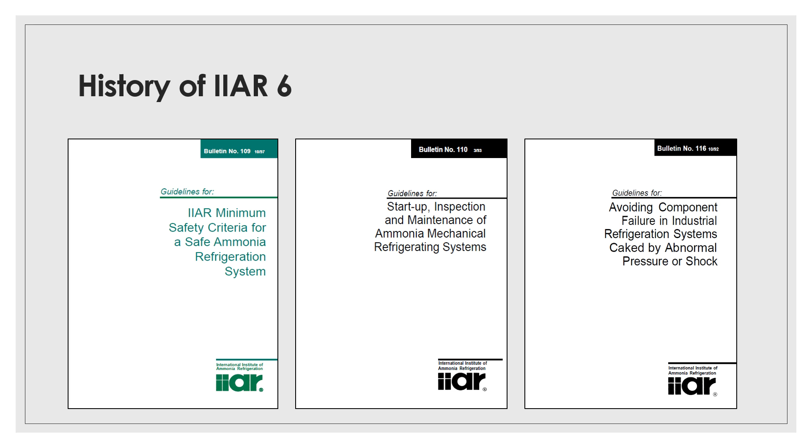Most notably, IIAR 6 builds upon and improves the content from several of IIAR's bulletins, namely Bulletin 109, 110, and 116. Bulletin 109 was published in 1997 and gained popularity primarily because of the checklist it contained, which came to be affectionately known as B109s.

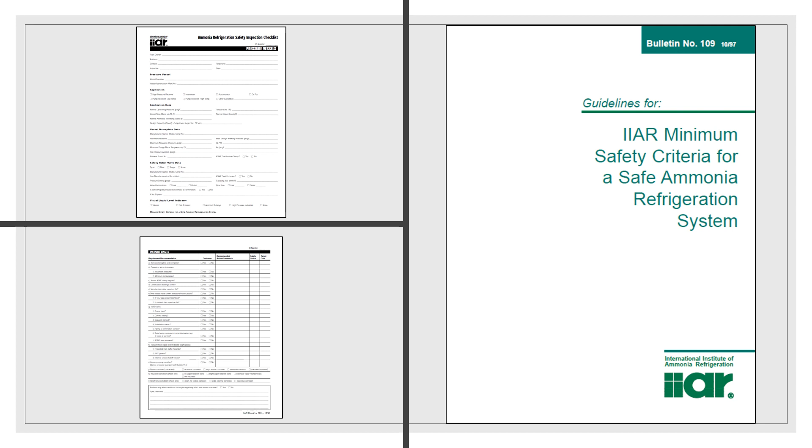The B109 checklists were long considered the gold standard for both performing and documenting annual mechanical integrity inspections of ammonia refrigeration systems. Similarly, IIAR Bulletin 110 contained many helpful resources regarding inspection and maintenance of ammonia refrigeration systems.

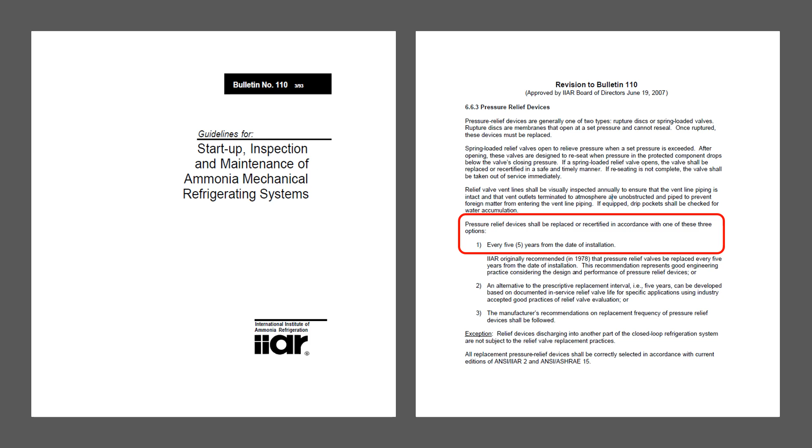While there is a lot that could be said about Bulletin 110, one of the more noteworthy sections of this document is displayed on this slide and requires that relief valves be replaced every 5 years unless an improved alternative method is developed. At the time that the bulletins were published, it was not known that these documents would be...

...viewed as recognized and generally accepted good engineering practice, or RAGAGEP, and therefore enforceable by OSHA and EPA. As such, the bulletins did not use code language, words such as shall and must, and are peppered with vague or optional requirements using words such as can, should, and may.

For example, IIAR Bulletin 110 Section 6.4.2 reads as follows: The system should be checked regularly for the presence of non-condensable gases, which should be purged as necessary from the receivers and/or condensers, preferably into a non-condensable gas remover or purger, but alternatively into water. I think you get the idea. Just in this short paragraph, optional phrases are used 7 times.

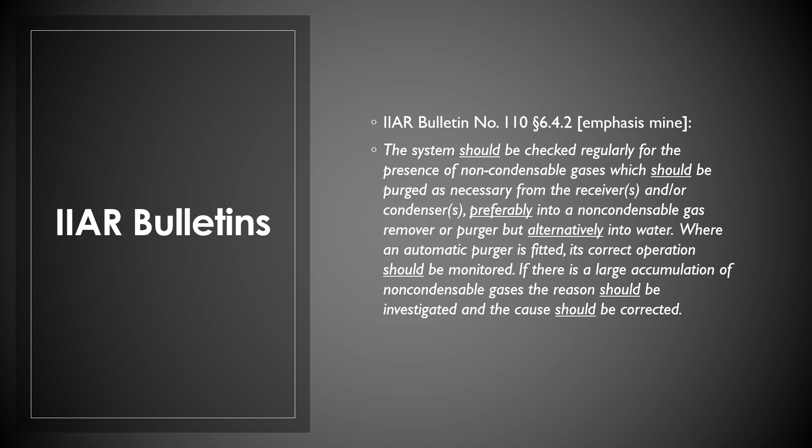As OSHA and EPA began to utilize IIAR bulletins as enforceable RAGAGEP, it became clear that the best way to address the shortcomings in the bulletins was to retire them altogether and replace them with standards written in code language.

Years ago, IIAR cast a vision to become the premier standard writing organization for ammonia refrigeration. At the time, the organization had only published 2 standards, but set its sights on a suite of standards to address ammonia refrigeration from cradle to grave.

In the past decade, IIAR has been successful in becoming a recognized standard writing organization. All major model codes now provide direct reference to IIAR standards. The term model code refers to building codes, fire codes, and mechanical codes that are enforced by local building departments when new construction occurs.

In California, the governing model codes are the California Mechanical Code, California Building Code, and California Fire Codes. To stress the importance of IIAR standards in these model codes, I propose to you that when you hear the term IIAR standard, it carries the same weight as Mechanical Code or Fire Code.

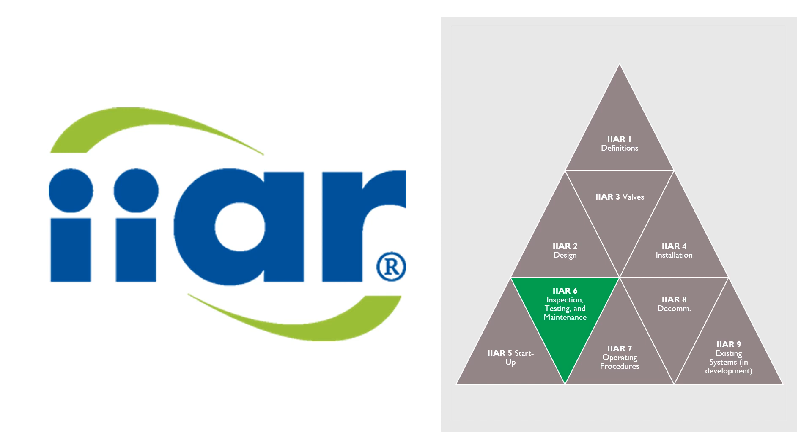Standard 6 is the most recent addition to IIAR's suite of standards and was published in the summer of 2019. As a document, Standard 6 is divided into 3 parts.

Part 1 addresses general requirements for the inspection, testing, and maintenance program, while Part 2 contains the prescriptive ITM tasks for various types of equipment. Both Part 1 and Part 2 are normative, meaning these sections are mandatory. Therefore, you'll see words such as required, shall, must, and will in these chapters.

Part 3 contains several appendices that are informative or supplemental. These appendices are not intended to be required, but rather informational. In Part 3, you'll find words such as should, may, could, and can.

To allay any worry that you might already be out of compliance due to the requirements in this new standard, it is worth highlighting that Standard 6 is a voluntary standard until adopted by an owner or an authority having jurisdiction. Thankfully, the text of Section 4.1.3 is consistent with the approach we've promoted regarding RAGAGEP changes in the past. Facilities need not change their mechanical integrity RAGAGEP simply because a new standard has been published.

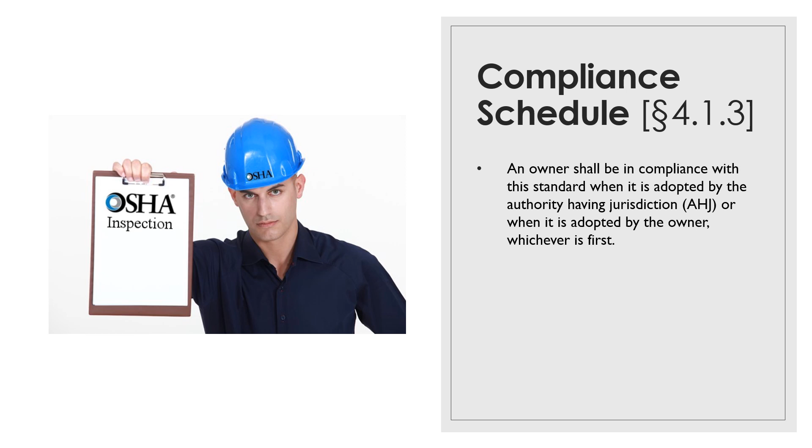However, this standard is the most current reflection of our industry's consensus toward inspection, testing, and maintenance of ammonia refrigeration systems, so it will be important to monitor how government agencies such as OSHA and EPA elect to use this document in enforcement. Before diving into specific requirements of any standard, it is necessary to understand who the standard was written for.

In other words, is it IIAR's intention that this standard apply to me? The purpose of Standard 6 is communicated in Section 1.1, which states that the document specifies minimum requirements for inspection, testing, and maintenance for closed-circuit ammonia refrigeration systems. The next paragraph succinctly describes the scope of the standard as record-keeping, inspection, testing, and maintenance of closed-circuit ammonia refrigeration systems.

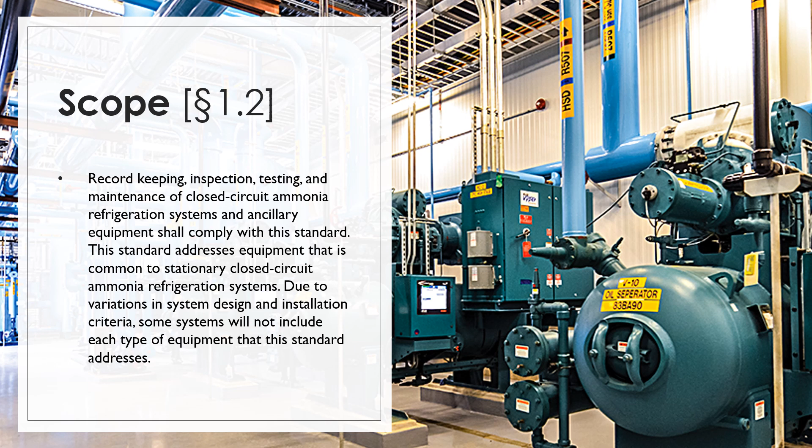and ancillary equipment. It is worth noting that the scope of the document is not dependent on the amount of ammonia in a system. In other words, Standard 6 does not distinguish between Program 2 and Program 3 like the CalARP and RMP regulations do.

Who is responsible for implementing an ITM program at your facility? Section 4.1.1 speaks to that very question when it states that the owner or the owner's designated representative shall be responsible for overseeing and ensuring that inspection, testing, and maintenance be performed in accordance with the requirements of this standard.

While the owner or the designated representative is responsible for ensuring that ITM tasks are performed in accordance with Standard 6, compliance with the standard is voluntary until either of the following occurs: 1. The authority having jurisdiction adopts the standard, or 2. The owner adopts the standard.

Common authorities include building and fire code officials, OSHA, US EPA, and local enforcement agencies such as the CUPAs in California. There typically isn't an official announcement when an authority having jurisdiction begins applying a new standard for issuing citations, so our industry will likely learn how each agency plans to enforce Standard 6 in the coming months.

We advise all facilities to be prepared to defend the basis for each mechanical integrity task and task frequency in your PSM program. As stated earlier, a facility need not change RAGAGEPs simply because a new standard has been published. But due to the importance of this particular standard, it would be prudent to perform a gap analysis of existing ITM tasks against what is contained in Standard 6 and adjust your MI program accordingly.

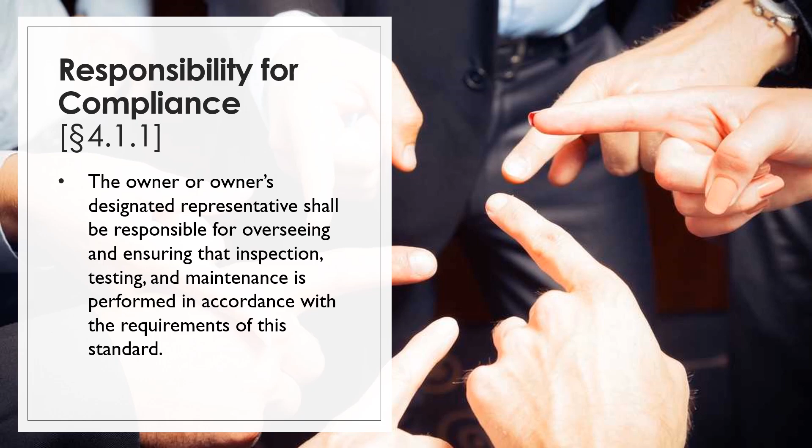One of the more noteworthy effects of Standard 6 being published is that Bulletin 109 has been officially retired. IIAR Standard 6 Appendix B includes improved checklists that aim to build upon the foundation of B109. B109 included 10 checklists, while Standard 6 has 12. Notably, new checklists have been developed for purgers and ammonia absorption systems.

The ventilation checklist in B109 has been expanded to include other safety devices and renamed Safety Systems. Some content has been moved from the B109 General Safety Checklist and placed in Safety Systems, so it was fitting to rename the checklist General System.

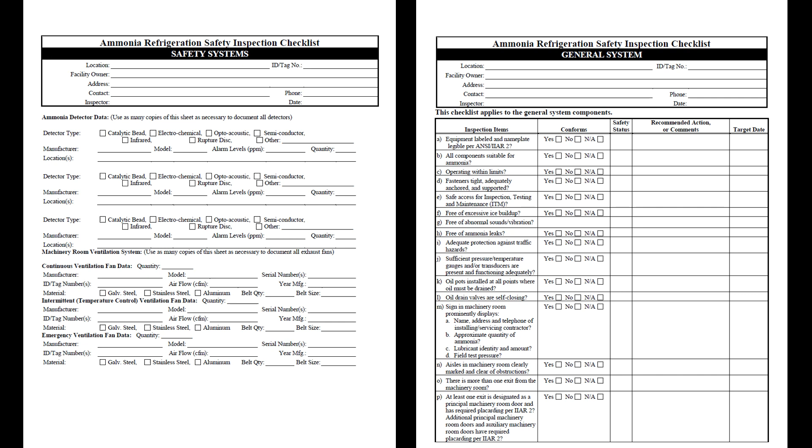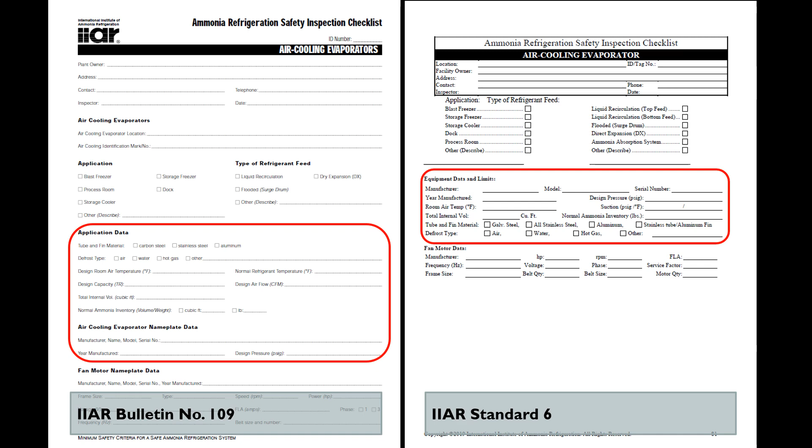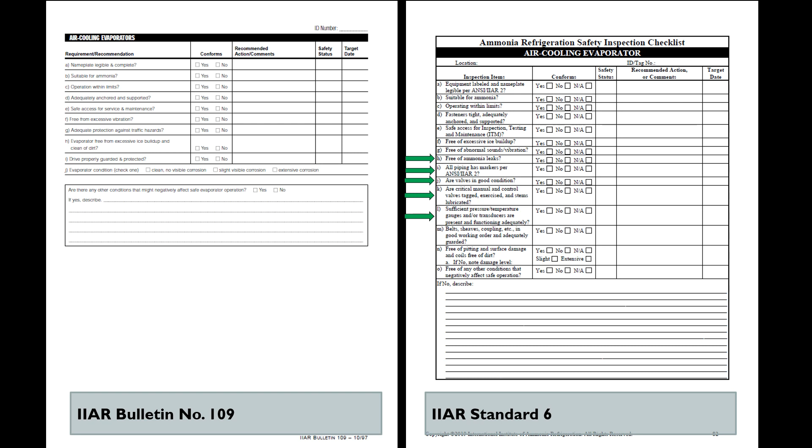A noteworthy difference between B109 and Standard 6 Appendix B is that the new checklists contain additional content not included in B109. It's beyond the scope of this presentation to address each change, but this slide highlights 5 new questions that have been added, inquiring about leaks, pipe labeling, valve condition, valve exercising, and instrumentation.

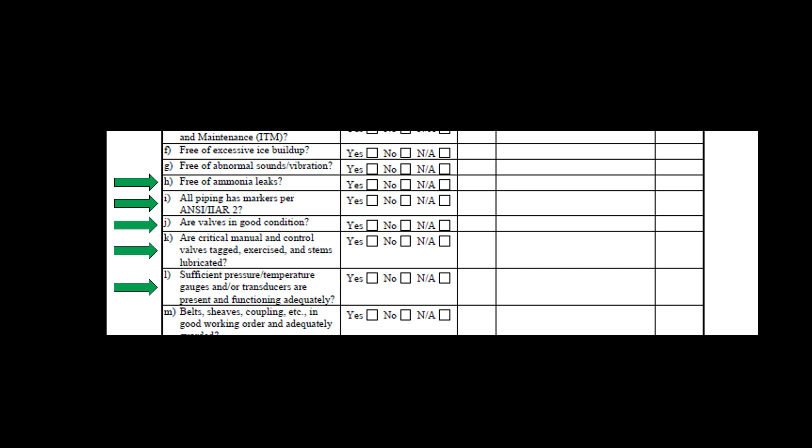Section 5.1 of Standard 6 lays out the foundational requirements of an ITM program. Most obligations in this section build upon an existing mechanical integrity requirement in the PSM regulations. For example, Section 5.1 requires that the owner or owner's designated representative shall ensure an inspection, testing, and maintenance program is developed to reduce the probability of an ammonia release.

This language carries much of the same intent as Title 8, Section 5189, J1A, which states that the employer shall establish and implement written procedures to maintain the ongoing integrity of process equipment and appurtenances.

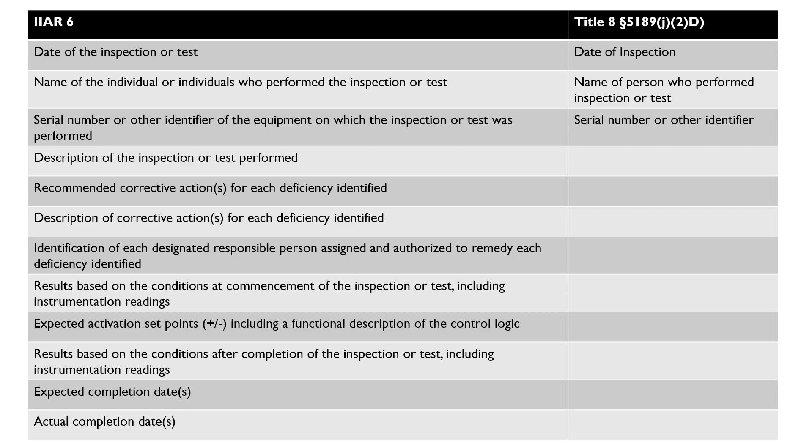As it relates to documenting inspection and tests, however, IIAR 6 requirements extend beyond PSM, as illustrated in this table. PSM only has 3 prescriptive documentation requirements, while Standard 6 has 12.

For those utilizing PSM Writer to document ITM tasks, there is no cause for alarm, as the requirements for IIAR 6 were incorporated into the software long before the document was published. The next several slides demonstrate how PSM Writer addresses each of the documentation requirements in Standard 6.

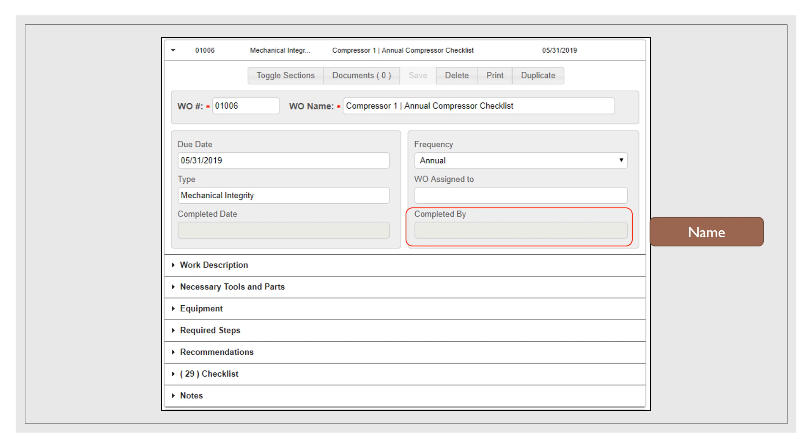The name of the inspector is inputted into the completed by field. The serial number is documented by clicking on the equipment section, then selecting the associated equipment. Specifications for each piece of equipment, including serial number, can be viewed by opening the equipment record.

An ITM description can be documented by typing into the work description text editor. Findings requiring correction are documented in the recommendations section. When adding a new recommendation, a description of the deficiency and the recommended remedial actions can be inputted.

The person responsible for correcting the recommendation can be added in the responsible person field, and the due date of the recommendation can be selected from the calendar dropdown. Once the recommendation has been resolved, the completed date field is used to indicate the actual date that the item was addressed.

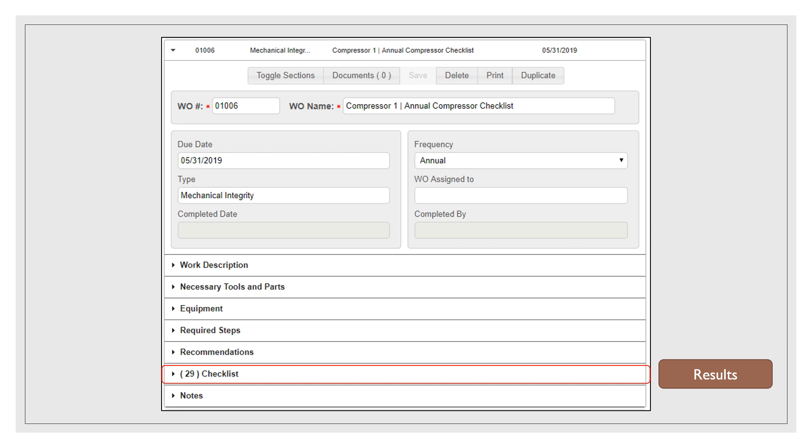Each work order can have multiple checklist questions which can serve to document the results of the inspection or test. Each question receives a yes, no, or not applicable answer, and the checklist comments field can be used for including information such as activation set points.

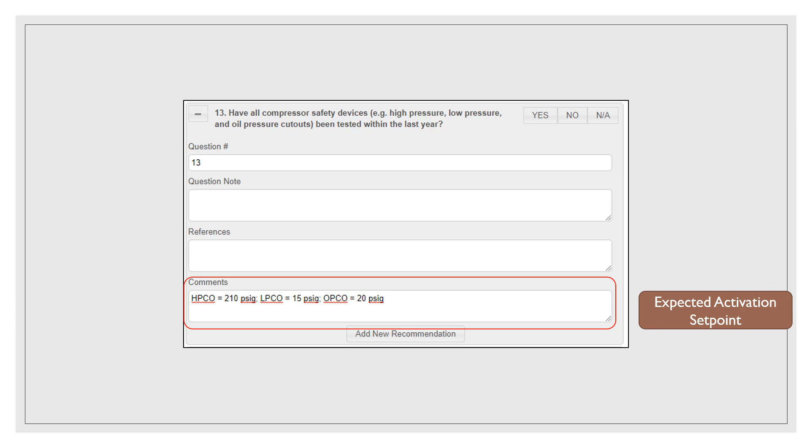I trust the previous set of slides helps reassure you that your Standard 6 ITM documentation requirements are being met if you're using PSM Writer.

Say you have a task to perform a compressor inspection annually. On year 1, you complete the task on July 1st, which results in the same task being due on July 1st of the next year.

When the next year rolls around, other obligations have filled the calendar during that period. In order to prevent the task from becoming past due, you knock it out early on June 15th. If the same situation occurs in subsequent years...

...before long, the task that was originally due in July is being performed in the spring. Standard 6 remedies this problem in Table 5.2, which defines the calendar basis of recurring frequencies used in the document. As the table illustrates, an annual task may be completed at an interval between 9 and 15 months and still be compliant.

A task required every 10 years can be completed any time after 9 years or before 11 years to comply with Standard 6.

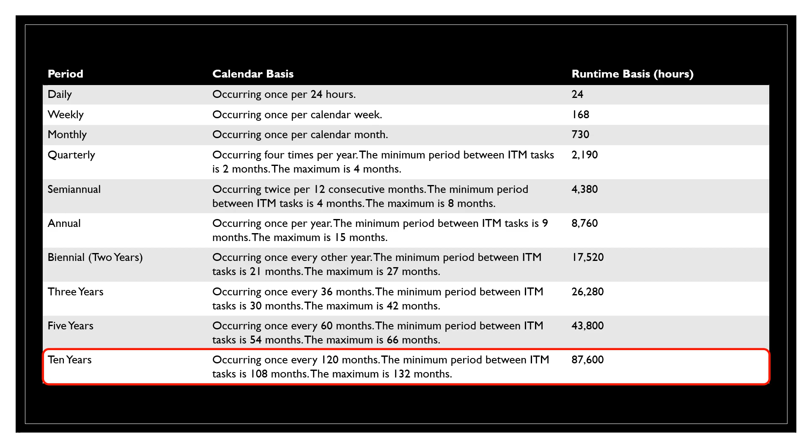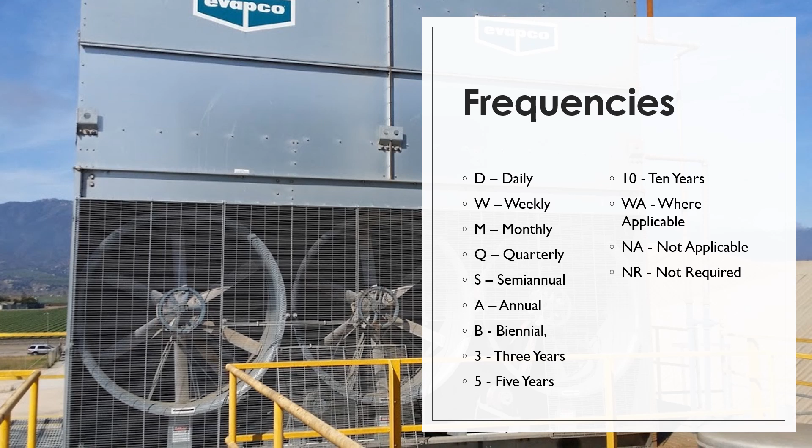Chapters 6 through 15 are filled with ITM tables, which list required tasks and frequencies. The frequency abbreviations used in the tables are shown in this slide. For example, when you see the letter S in an ITM table, you must recognize that the task is required semi-annually or every 6 months.

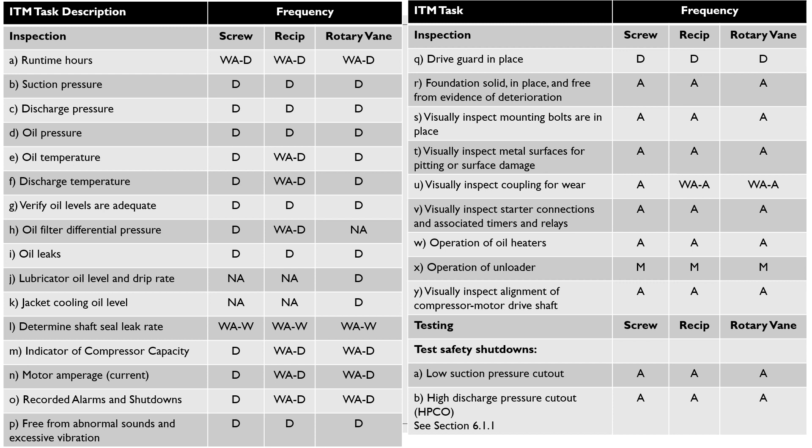Here is the ITM task table for compressors, included in Chapter 6. The table is laid out with the ITM task description in the left column and the frequency the task must be performed in the adjacent columns to the right. There are 3 columns to the right of the task descriptions which clarify the requirements for each of the major compressor types: screw, reciprocating, and rotary vane.

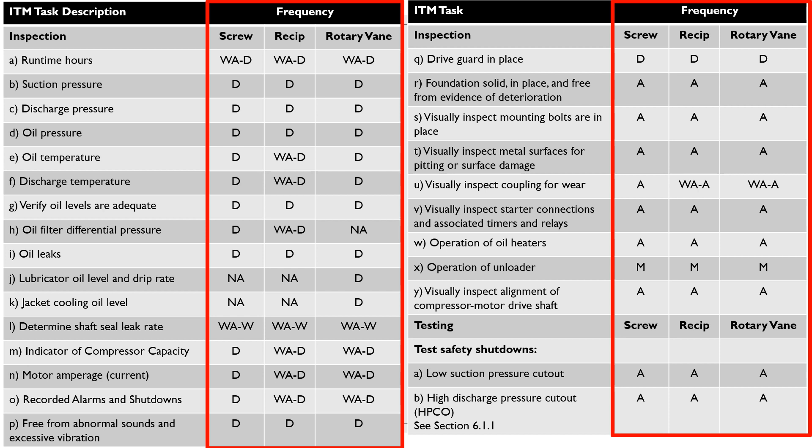To demonstrate how to read the table requirements, compressor high discharge pressure cutouts must be tested annually, as indicated by the A in the highlighted cells on this slide.

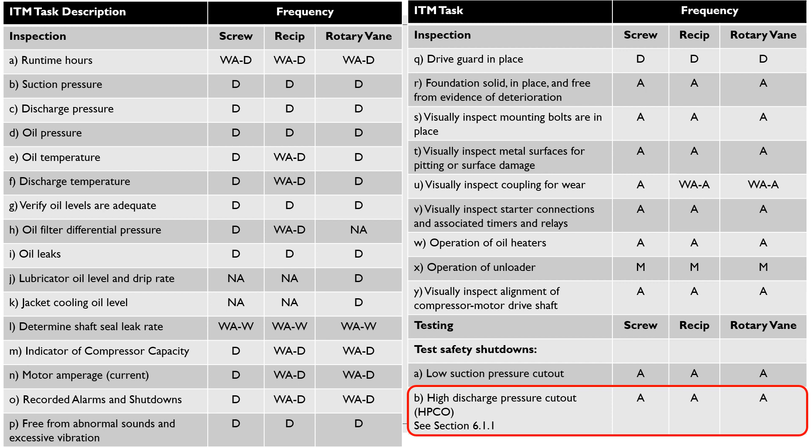We certainly don't have time to review each ITM task in Standard 6, but to help you get a sense of the breadth of the requirements, the following slides will quickly display each of the ITM requirements for compressors in Table 6.1.

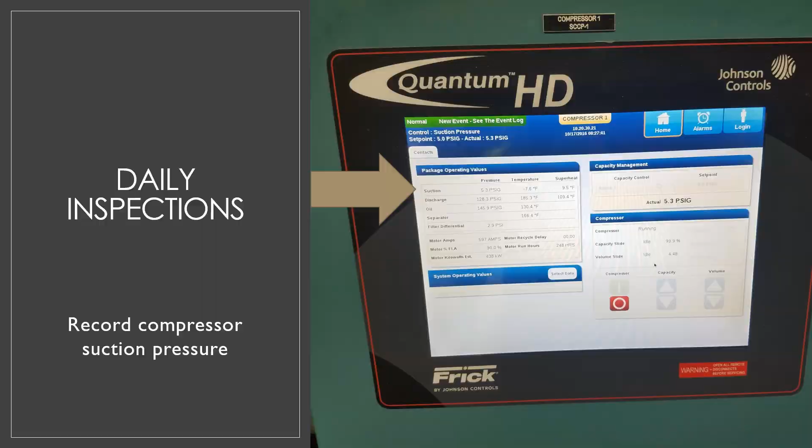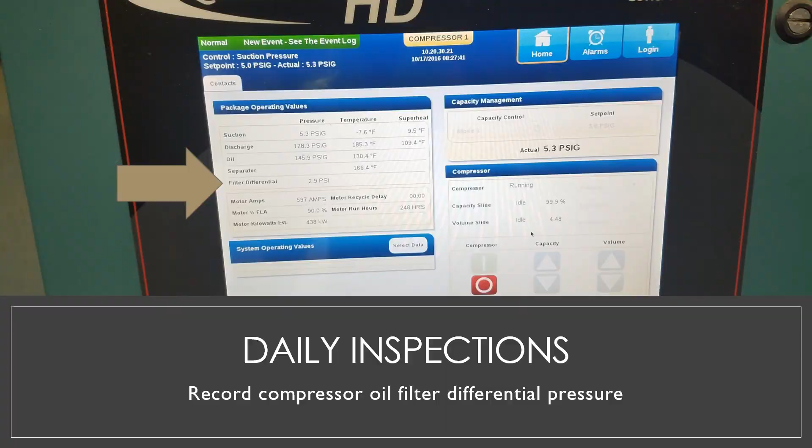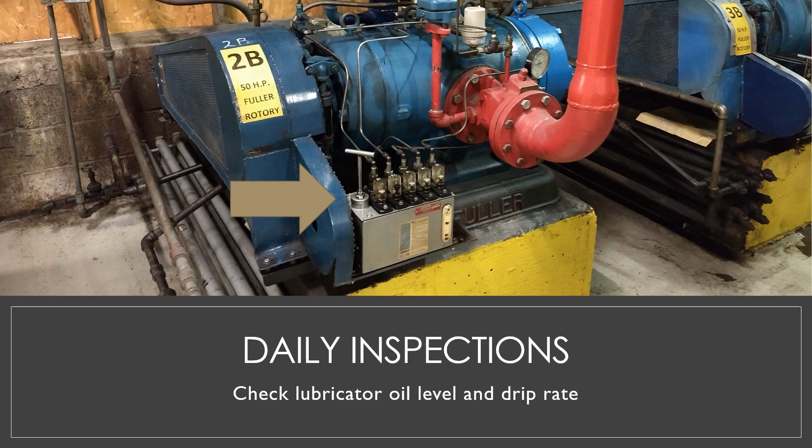The following items must be inspected daily: compressor runtime hours, suction pressure, discharge pressure, oil pressure, oil temperature, discharge temperature, oil filter differential pressure, compressor motor amperage, compressor alarms and shutdowns, oil levels, oil leaks, rotary vane compressor lubricator oil levels. The compressor should be inspected for unusual vibration.

Weekly, the shaft seal drip rate should be observed.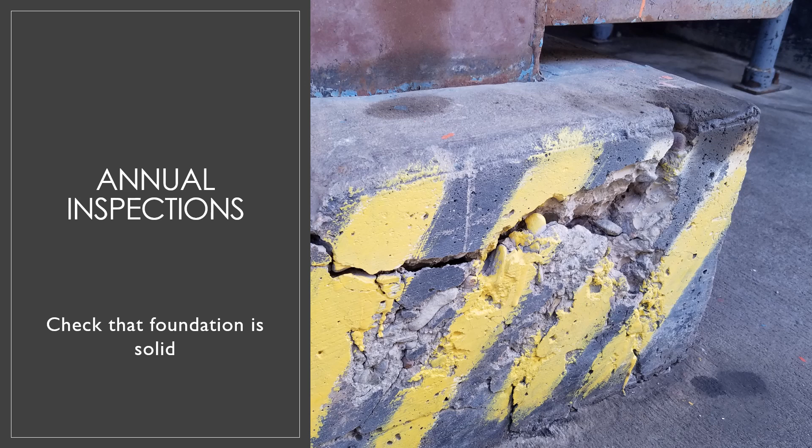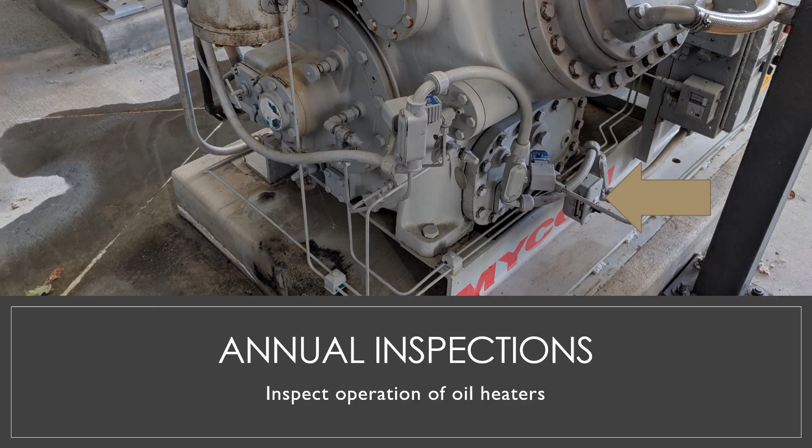Annual inspections include inspection of foundation, mounting bolts, metal surfaces for pitting or surface damage, inspect coupling for wear, starter connections, operation of oil heater, operation of unloader, alignment of motor drive shaft.

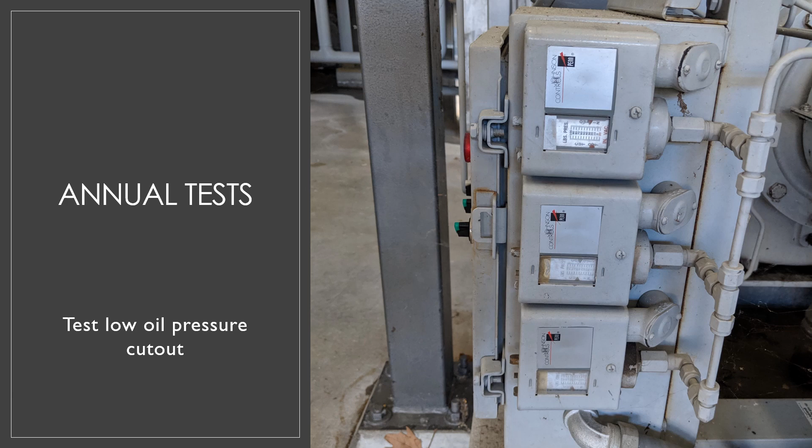Annual tests must be performed on the following: low suction pressure cutout, high discharge pressure cutout, high discharge temperature cutout, low oil pressure cutout, high liquid level cutout.

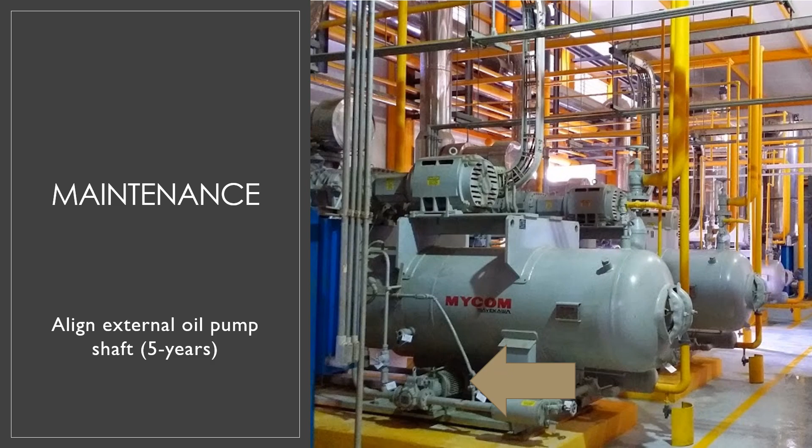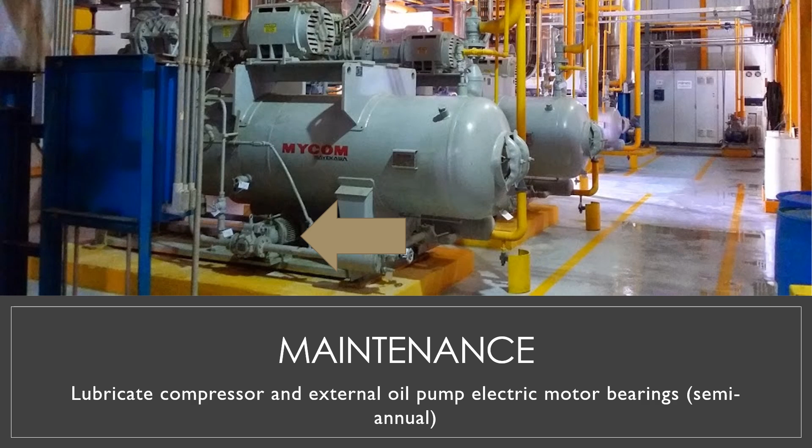Maintenance tasks in Table 6.1 include: add compressor oil, change oil filter, clean external oil pump, perform oil analysis, align external oil pump shaft, change oil, verify coupling bolts are tight, replace shaft seal, measure compressor motor drive shaft alignment.

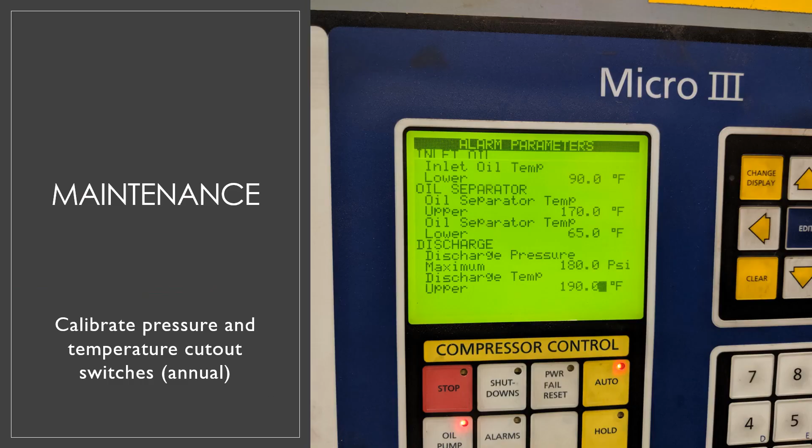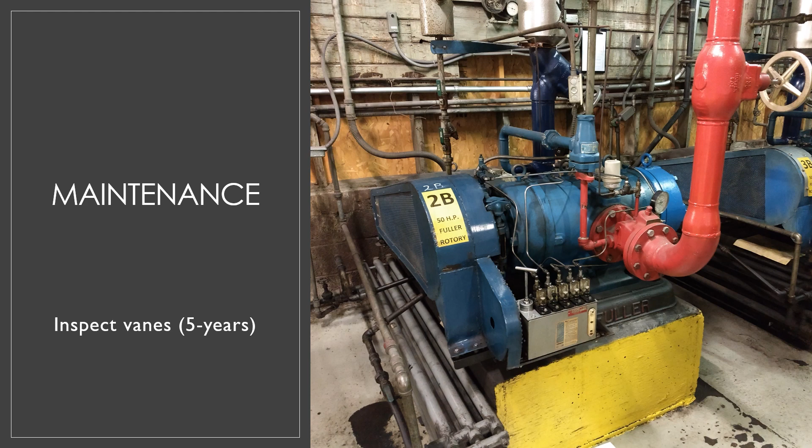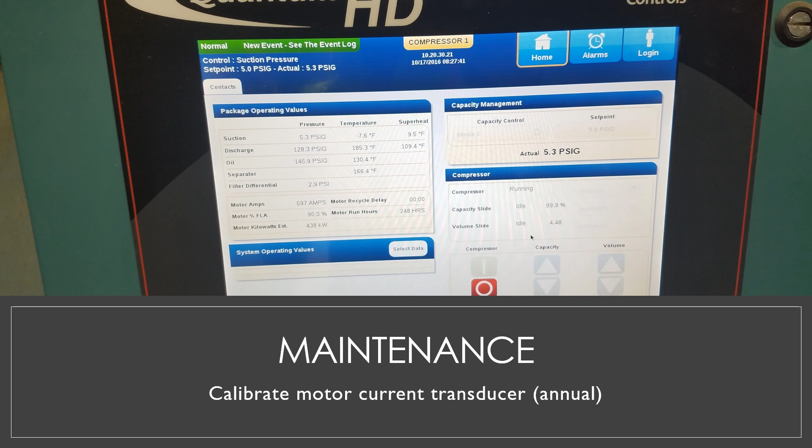Additional tasks include: lubricate compressor and external oil pump electric motor, check motor leads and insulation, verify integrity of control power, check starter connection, calibrate pressure and temperature switches, check rotor for axial play, open recip compressors to check pistons, rings, and plate valves, inspect vanes on rotary vane compressors, check belt tension where applicable, check pulley connections, check for electrical hotspots, calibrate motor current transducer, and calibrate capacity and volume slide valve.

This is the final ITM requirement in Table 6.1.

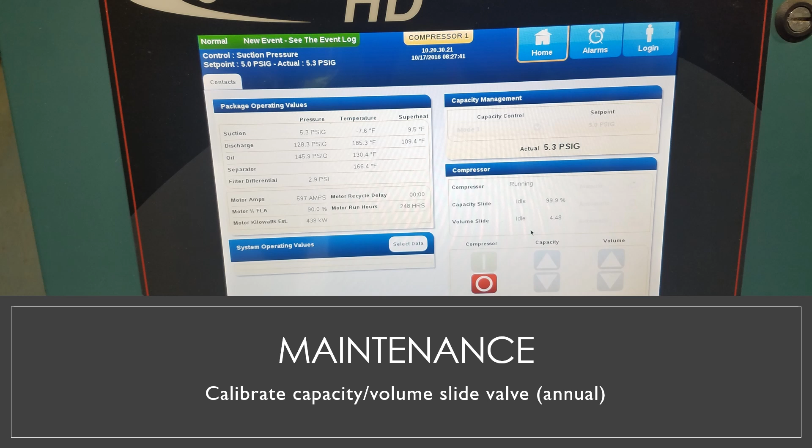I realize that seeing all this information so quickly can be a bit overwhelming, but I think it is important to give a sense of how the tables in chapters 6 through 15 are constructed. Keep in mind that the previous slides displayed the requirements for one table, but there are 17 total tables in Standard 6.

Section 5.3 summarizes minimum requirements for ITM program record keeping. Most of the items listed parallel an existing process safety information requirement in the PSM regulations.

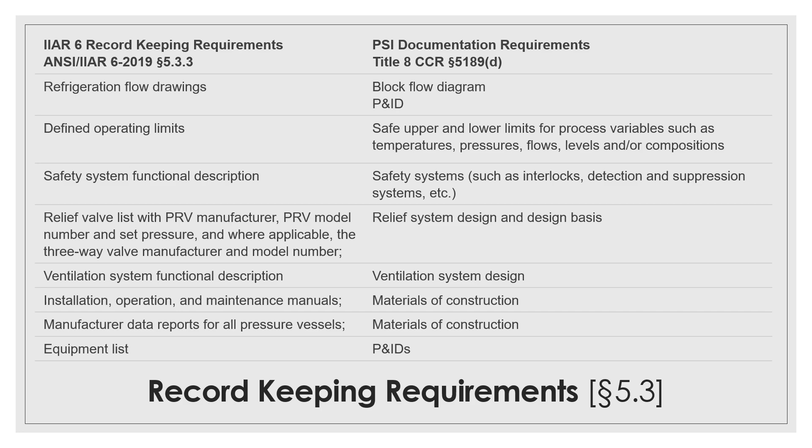This table compares the requirements of Standard 6 to PSM. As you can see, Standard 6 does not introduce many new record keeping requirements. If you have already prepared process safety information documentation, then the requirements in Standard 6 are likely already addressed.

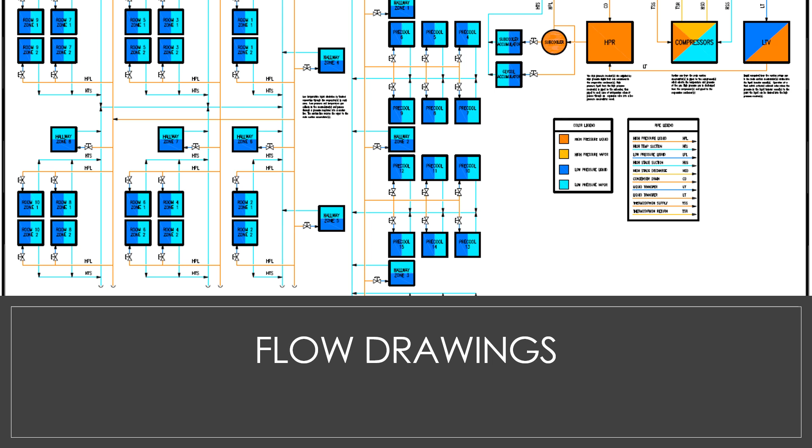Examples of required Standard 6 record-keeping documents are displayed in the next several slides. Examples of flow diagrams include block flow diagrams and P&IDs.

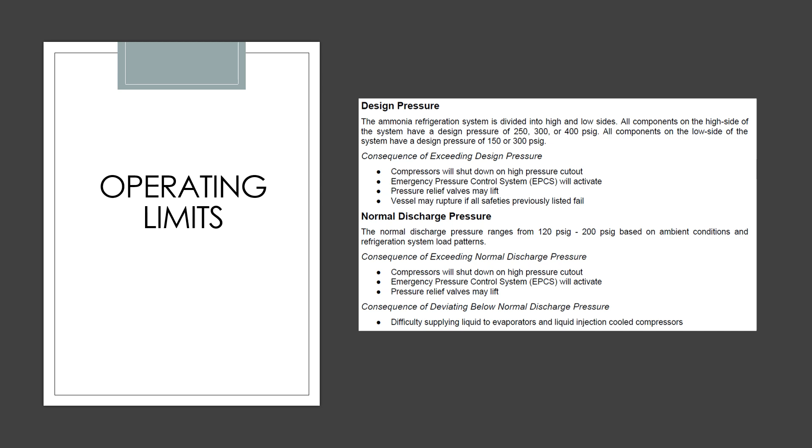Operating limits are typically addressed in process safety information, but are also included in key documents such as manufacturer data reports.

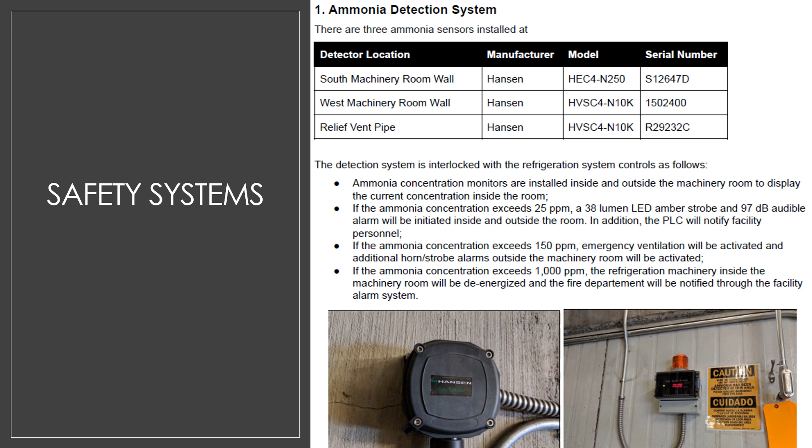Similarly, PSI requires a description of safety systems to be prepared, which typically includes a functional description of the detection system and other safety controls associated with the refrigeration system.

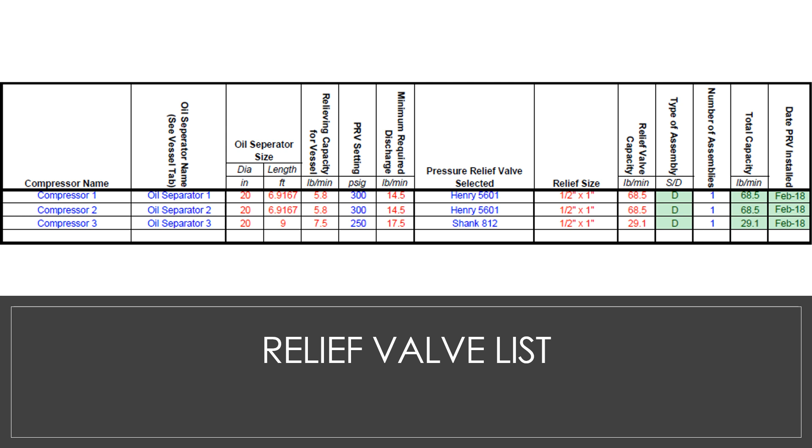Standard 6 requires a relief valve list to be prepared, which is also required as part of the relief system design and design basis requirement in process safety information.

A functional description of the ventilation system should include system specifications along with control strategies.

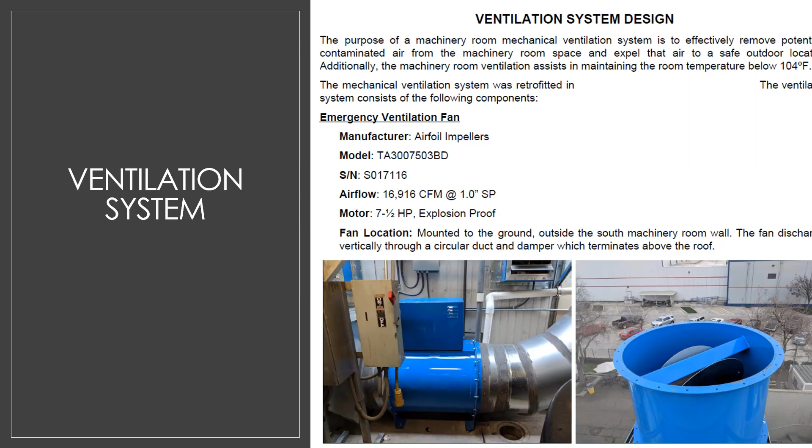Most equipment installation, operation, and maintenance manuals are readily available on the internet and can be downloaded and organized with other ITM record-keeping documents.

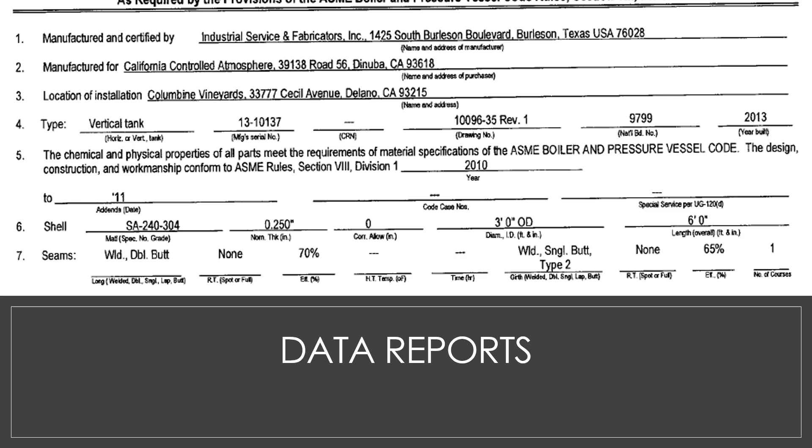Other record-keeping requirements include obtaining vessel and heat exchanger data reports, organizing equipment lists with specifications, maintaining an operational log of key system parameters, documenting ammonia purity records, and maintaining a log of oil added to and removed from the refrigeration system.

How long does Standard 6 require you to keep ammonia refrigeration records? Table 5.3.7 lays out the minimum retention period for refrigeration system records.

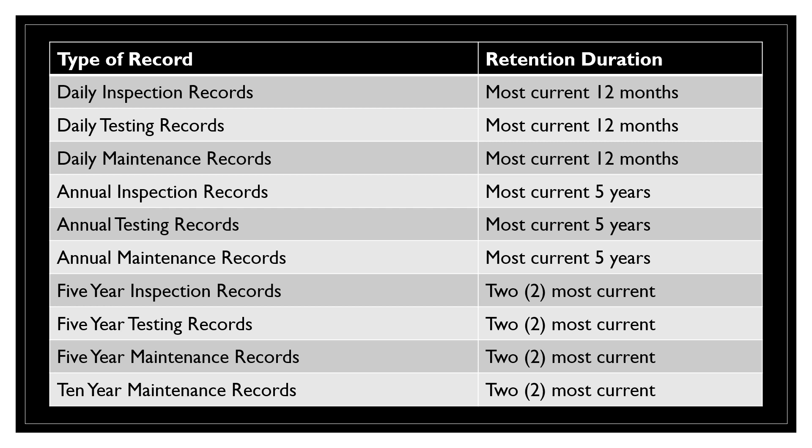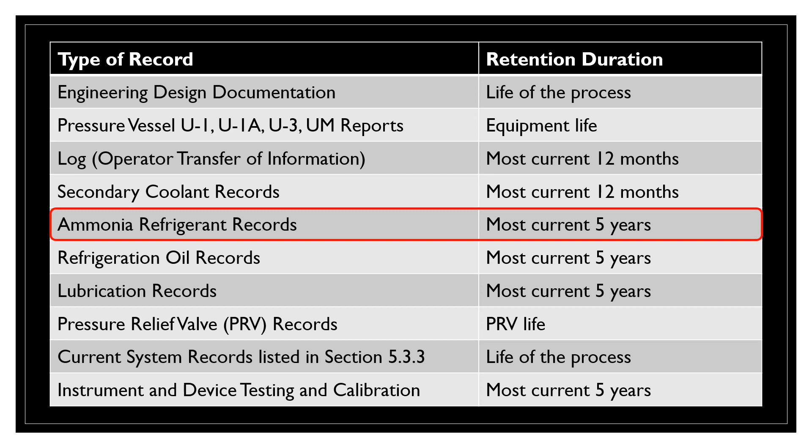As this slide and the next illustrate, the retention duration is dependent on the type of record. For example, engineering design documentation must be kept for the life of the process, but ammonia refrigerant records only need to be maintained for the previous 5 years.

This concludes my presentation on an overview of IIAR Standard 6. The meat and potatoes of this document are in chapters 6 through 15, which contain inspection, testing, and maintenance task tables for each category of equipment. We highly recommend that you purchase your own copy of the standard from IIAR's website.